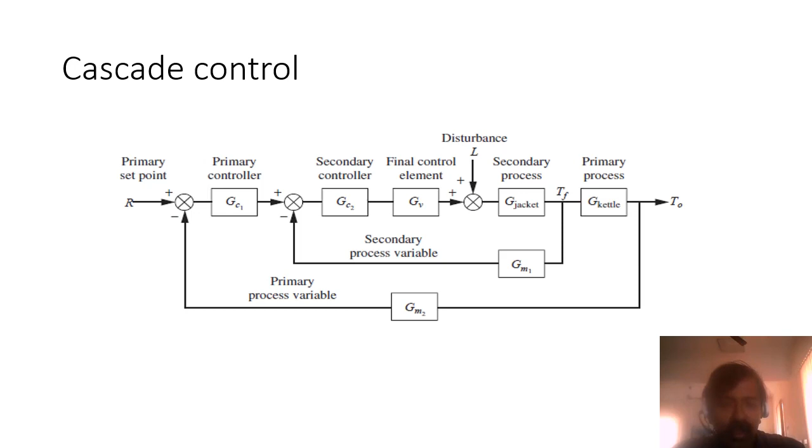So the secondary controller will take care of the effect of the secondary variable over the primary variable in advance. It will try to nullify the effect of that over the process variable in advance. Thereby, it will help the primary process to maintain the temperature at the desired set point value, and it can ensure effective control mechanisms. So that's what we learned.

Now let us move ahead and discuss feed-forward controllers. Can you recall why we need to go in for a feed-forward control mechanism? The idea was very clear. We have a disturbance and we know the model of the disturbance, how it is going to affect the process. So there is a prediction model available which can help us predict exactly the impact of the disturbance over the process.

If you know something in advance, you can always take preventive control actions in advance. So here also we are going to use a disturbance model, and we'll be designing a feed-forward controller, which will take a predictive or advanced control. I can say it is an anticipatory control action it can take in advance. Thereby, it can completely eliminate the effect of disturbance over the process output. So that's what we discussed.

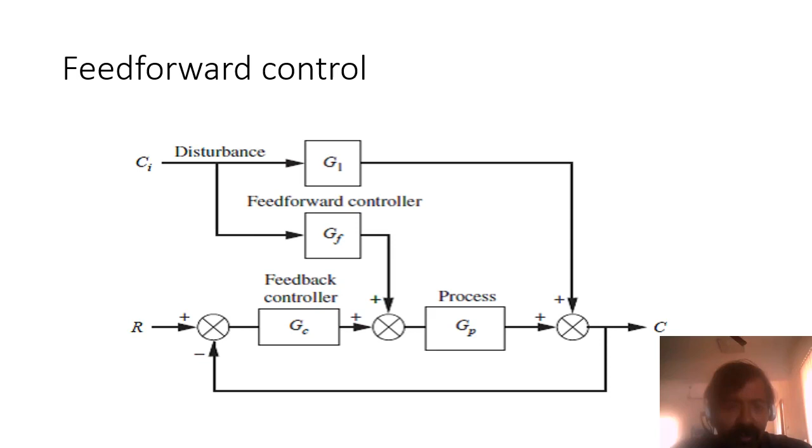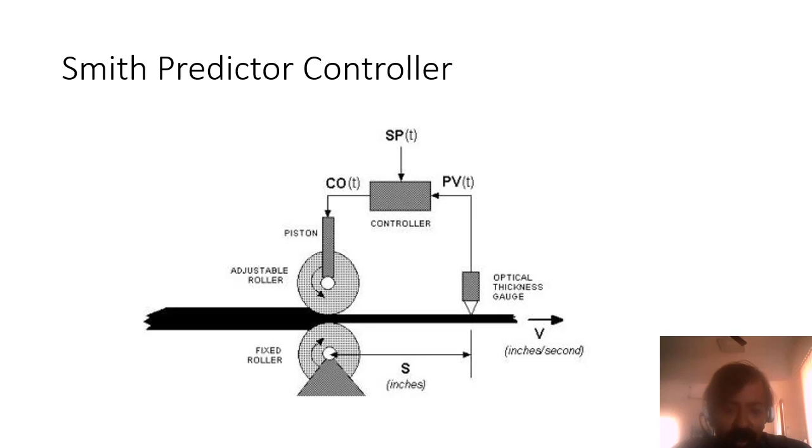This dead time normally deteriorates the performance of the controller. So it's essential for us to design some mechanism with the help of a mathematical model to eliminate the effect of this dead time over the process. That's where the idea of a Smith predictor really comes into the picture.

In the real world process you cannot exclude dead time from the process. So the only idea we can imagine is to employ a mathematical model, use a computer to simulate it and try to eliminate the effect of dead time. That's what Smith did around 1960. He employed a mathematical model and ran it as a simulation in a computer in parallel with the process, and with a kind of decoupling mechanism he eliminated the effect of dead time, and thereby obtained the predicted process variable.

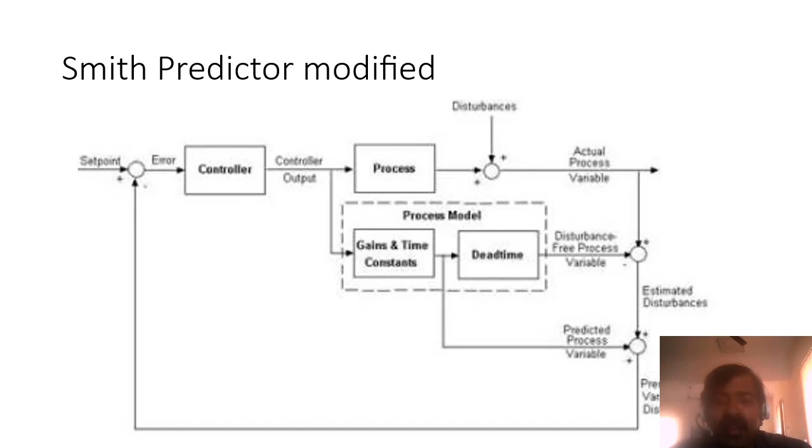So with the help of a mathematical model, we are decoupling the effect of dead time over the process, taking corrective control actions, and ensuring the appropriate performance of the control system. In this diagram, you can see the estimated disturbances here, and the model gain and time constants are all put inside this block. Here you are measuring the predicted process variable with the disturbances, and with the help of a controller you are controlling it. Clearly, the model dead time is decoupled here.

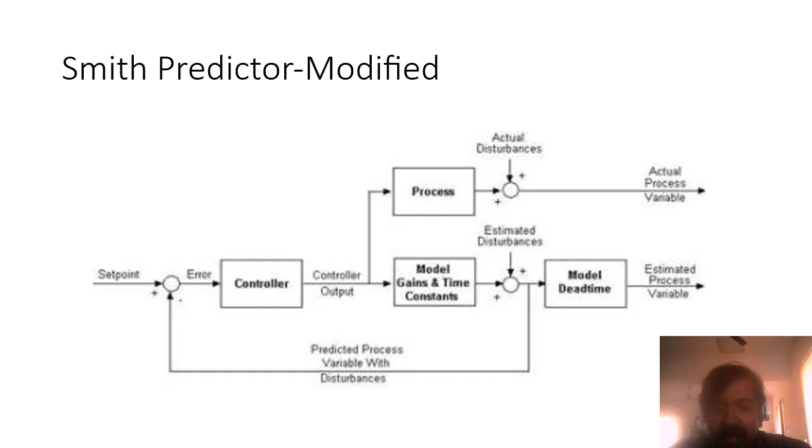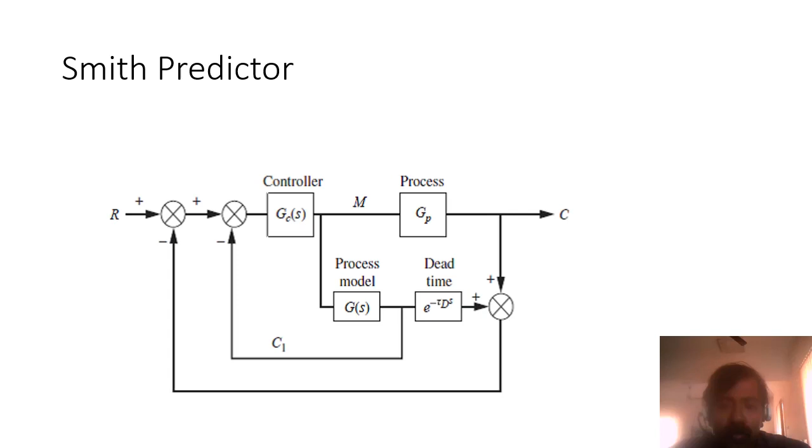So if you look at the corresponding modified version of a Smith predictor, something like this you can notice. So here C1 is the variable that you are interested in. This variable is not influenced by the dead time. So naturally you can take corrective control action, and thereby you can ensure the process output is maintained at a desired set point.

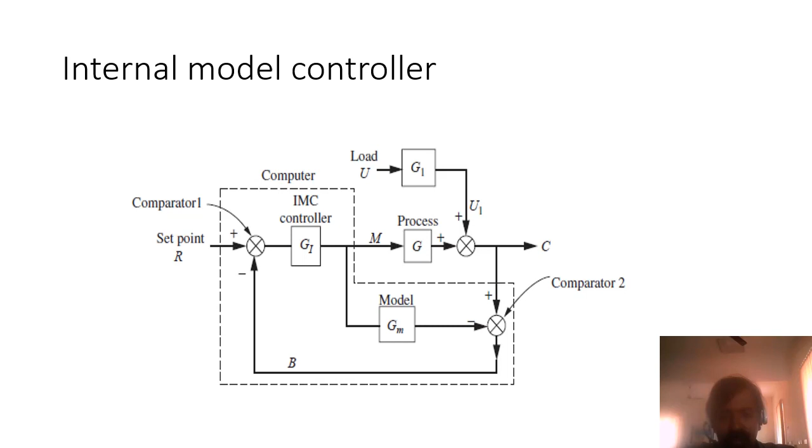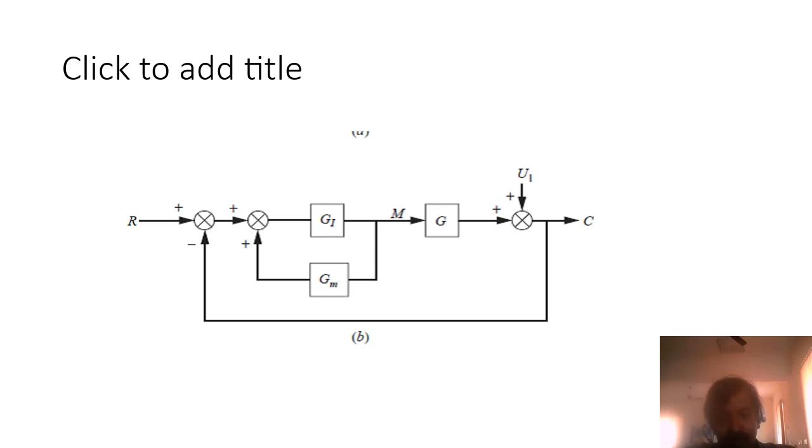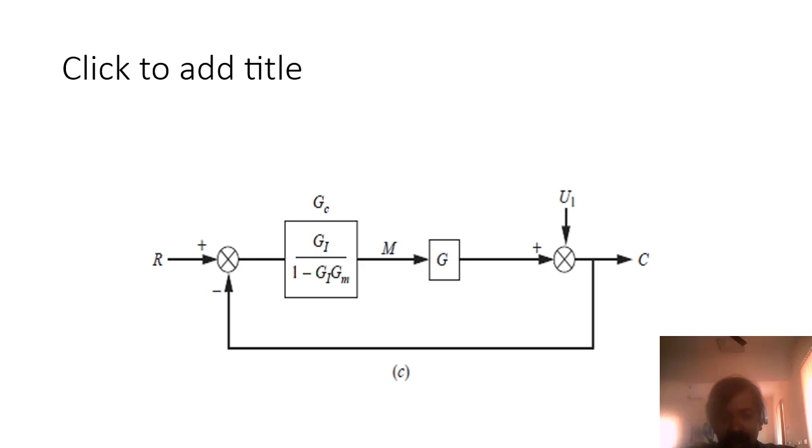So here is the load disturbances that are going to act over the process, and C is the controlled output that in fact most of you are sure about. So the first stage of this process, if you look at the previous diagram, very clearly you could have noticed that the controller output is given to a mathematical model. So here is a mathematical model, and there is a positive feedback happening over here, and we can employ a very basic block diagram based representation for this, and you can get a reduced block diagram representation for the control system here. So you got GI by 1 minus GI into GM can fetch you the corresponding controller action, and G is the corresponding process variable.

So from this structure clearly you can notice that C, the controlled output, is going to be equal to U1 plus GGI by 1 plus GI, G minus GM, into R minus U1. So it's a very simple block diagrammatic representation. You can reduce the block diagram and you can obtain this particular expression quite comfortably. And then if you look at the denominator of this, you can see there is a term called G minus GM.

So the question that is before you is when this particular term will become 0, G minus GM. Can you think about that? Yeah, it's quite obvious: when the process model is equal to the real-time process, then naturally G minus GM will become 0. So once this term vanishes, you're going to get G into GI, R minus U1. So this diagram in fact represents that. G into GI, R minus U1, and you can also see U1 is getting added up to get the corresponding process output.

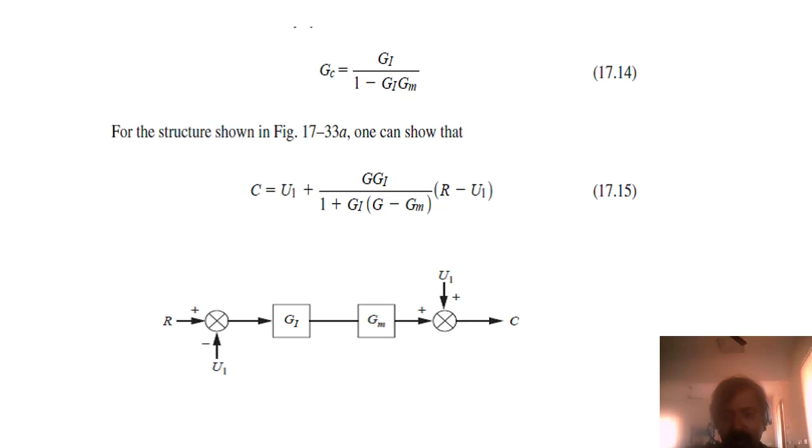So naturally, if I'm going to choose GI is equal to 1 by GM, what will happen here? For example, if I'm going to have a GM of 1 by tau s plus 1, GI will become tau s plus 1, and therefore GI is going to have a kind of a problem like a derivative control mode. So you have already learned that the derivative control mode is not sufficient for maintaining a controller performance.

Do you know the reasons? I hope you can recall the reasons. Derivative control mode normally is going to aggravate the problem of high frequency noises. Apart from that, if the steady state error is going to be equal to 0, the derivative control action is going to take 0 control action. So that's not preferred. So if I'm going to choose GI is equal to 1 by GM, it's going to give me a lot of trouble. So I need to devise some mechanisms so that I can avoid these kind of scenarios.

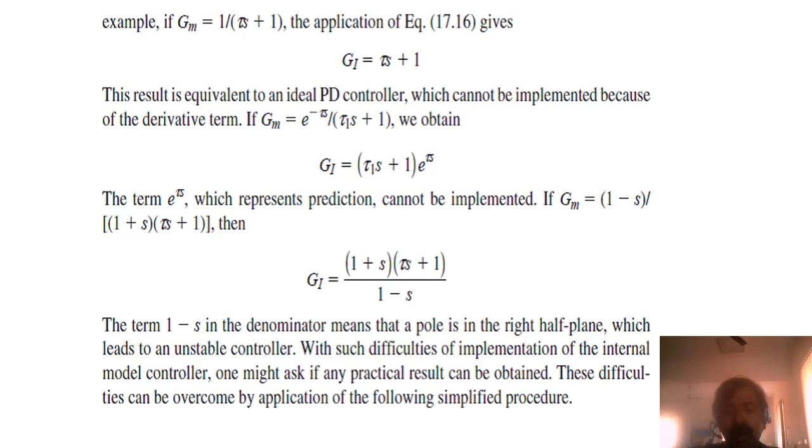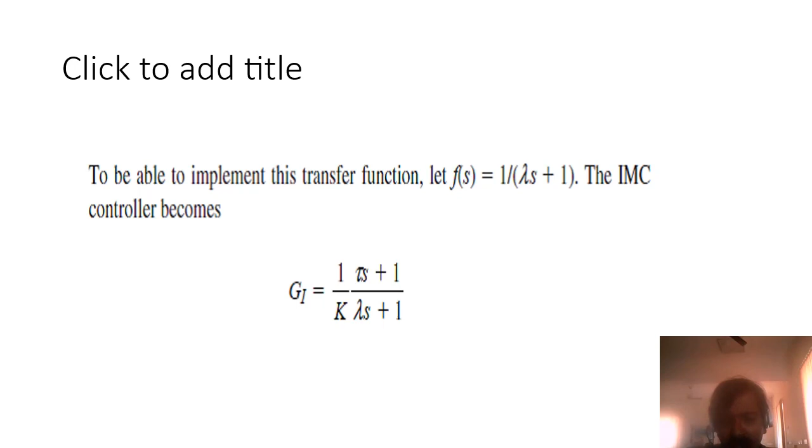So that's where the idea of the internal model control really comes into picture. So here you can see GM is equal to K by tau s plus 1, and GI is equal to 1 by GM is going to give me tau s plus 1 by K. But that's not what I'm looking for. I'm going to introduce deliberately a function like f of s equal to 1 by lambda s plus 1, which when added along with the GI can provide me a much better kind of control action, which is more like this: GI is equal to tau s plus 1 by K into lambda s plus 1. So this is the idea behind the internal model control.

Maybe you can simulate this in a MATLAB Simulink environment, which I have been advocating for some time. Maybe you can see some of the results and try to submit your results in the Google Classroom forums. Maybe I'll go through it and get back to you.